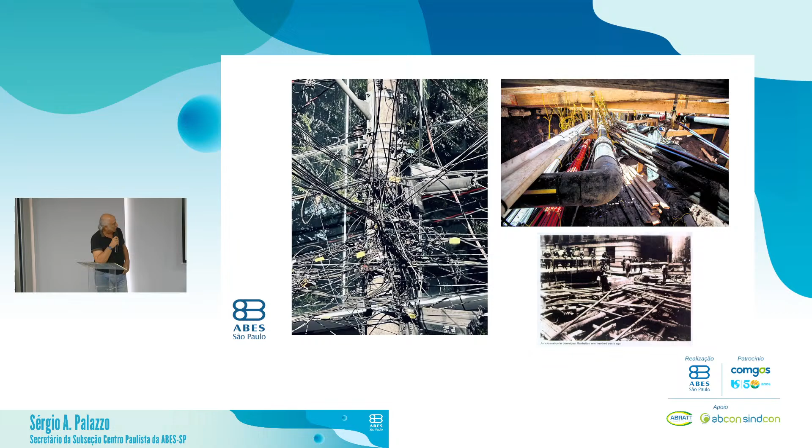Eu acho que há. Então, na próxima imagem, a gente está se valendo já das computações gráficas, do BIM, de todas essas tecnologias que a gente consegue estruturar o nosso arquivo, o nosso ativo do subsolo.

Essa é uma imagem de uma rede, das redes existentes nessa região nos Estados Unidos. Essa outra dá bem uma ideia do que se pode fazer dentro das nossas instalações, todas elas, todos os serviços públicos. A próxima: esse é um cadastro completo ao qual a gente pode ter acesso hoje, todos tendo acesso à mesma base.

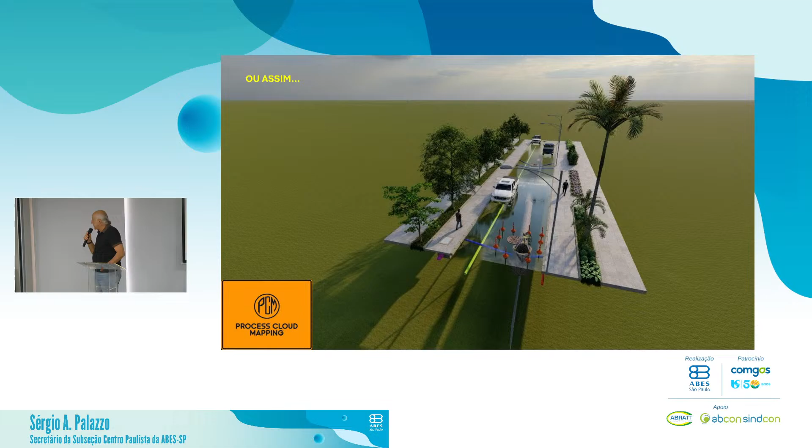E por fim, um vídeo. Esse vídeo está sendo divulgado, já é aplicado na Colômbia. Então, eu sonho que a gente possa fazer isso. A Colômbia fez, por que que nós não podemos fazer?

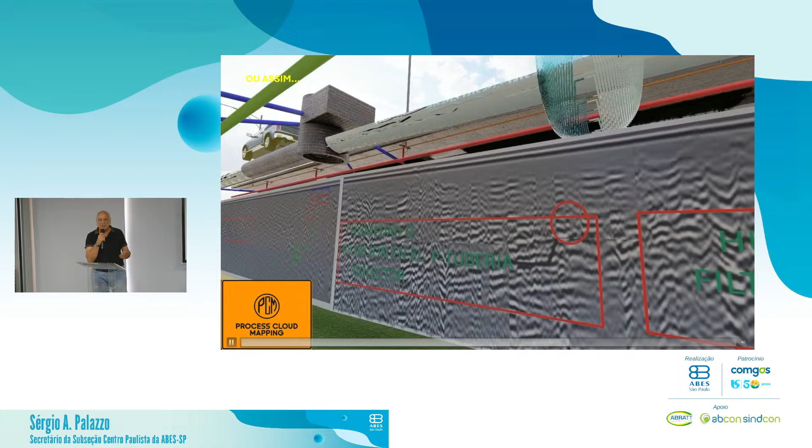Então, essa é a realidade de uma manutenção numa rede de esgotos, traduzida para uma imagem em 3D, numa computação gráfica, baseada em todos os levantamentos que foram feitos. Então, o que vocês vão ver aqui hoje é de que forma eu posso captar os dados, coletar dados, para que o pessoal especialista nessa área traduza esses dados numa exposição desse tipo aí.

Ok. Então, eu também queria ver quem que está já no grupo com a gente, Vinícius. Quem? Ok, nós já temos 3 convidados conosco aqui ao vivo.

Alguns entrarão no horário da palestra. So I want to say good morning for some of you, Sam and Eric. And which is the other one, Vinícius? Quem é o terceiro? Alan Leidner. O Alan Leidner, good to see you or hear you here. And we'll be soon talking about...

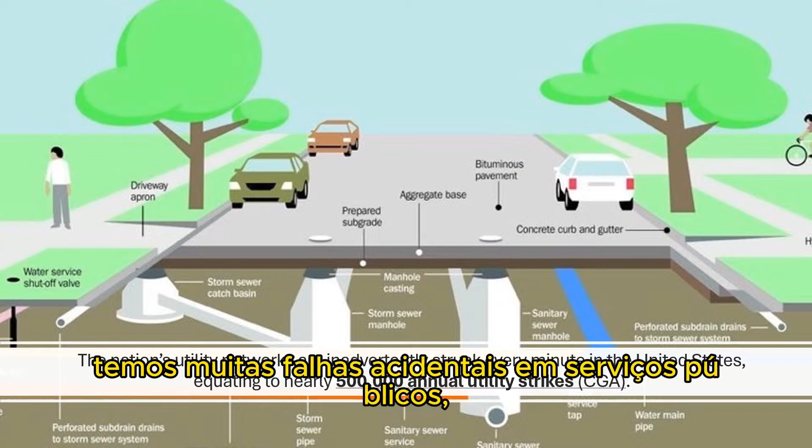If we look at the nation's underground networks, a lot of inadvertent striking of utilities happens every minute in the United States, equating to about 500,000 annual utility strikes, according to the Common Ground Alliance. Some of that striking is a result of horizontal directional drilling, and some of those strikes are from open cut excavation type equipment. But unfortunately, with horizontal directional drilling, we're not excavating, so we're going underground, and sometimes we can hit a utility like a sewer lateral and not even know that we hit it until much longer, years later.

The primary impacts of damaging an underground utility include outages, explosions from gas, fires, flooding, disruption of emergency services, evacuation, downtime for businesses, and a lot of other issues. Some secondary impacts are potential injuries and death, criminal investigations, contamination of contaminants, project delays, financial liability, extra work orders, construction claims, higher insurance, and of course, bad publicity of these types of occurrences.

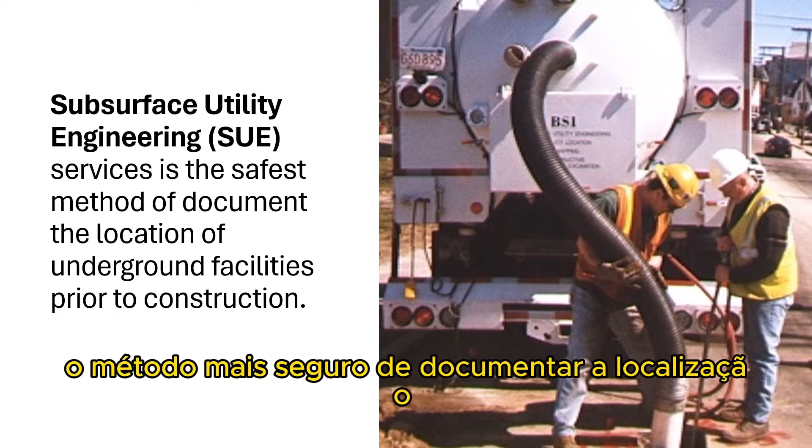The concept of subsurface utility engineering is really important, and it's the safest method to document the location of underground facilities prior to construction. When you look at before construction, there are different types of subsurface utility engineering applications. The most common would be vacuum excavation. We also do things like centerline profiling, utility mapping and records management, preliminary engineering design, cathodic protection, non-destructive methods, and soil sampling.

There are a couple of great standards that the American Society of Civil Engineers has out. One of them is the 3802, the standard guideline for the collection and depiction of existing subsurface utility data.

It's a very famous one, one that's utilized quite a lot. A newer one is subsurface utility engineering for municipalities, and it looks at pre-qualification criteria and scope of work guidance.

A study was done many years ago at Purdue University looking at the value added, and it found that for every $1 spent on subsurface utility engineering, the resulting savings was $4.62. That's a really big savings, almost 5 times the return, because we're identifying those utilities and avoiding costs from striking or hitting a utility.

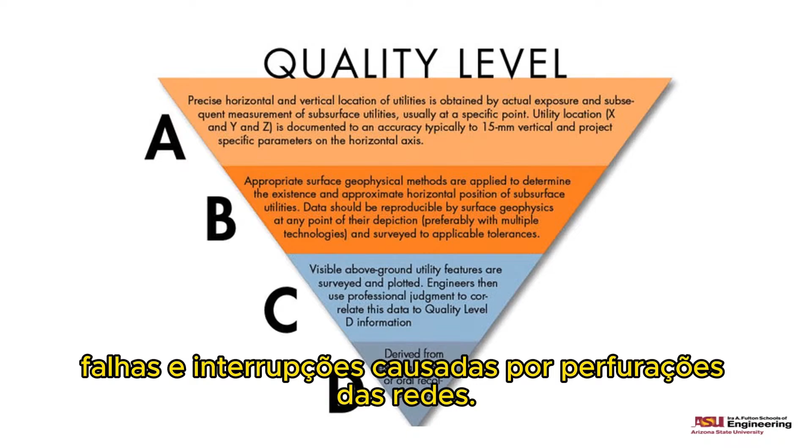We have 4 different quality levels of subsurface utility engineering. Quality level D is the lowest level, looking at existing records or oral recollections of what could be out there, up to quality level A, which involves precise horizontal and vertical locations through actual exposure and measurement of the utility, so you know exactly where it is. Within that range, A, B, and C are the different quality levels of subsurface utility engineering.

Some industry issues we find in utilities are lack of planning. We tend to be in a hurry, so sometimes that results in doing the job without proper planning or investigation. A lot of times we have outdated as-builts or incorrect blue stakes or utility markings in the area. There's also a lack of competent contractors—sometimes they just don't care, or don't really understand, and they proceed without identifying existing utilities. Insufficient equipment concerns, utility damages, and poor communication are also a big part of the industry that we worry about.

As I mentioned previously, excavators or horizontal directional drills tend to be the construction equipment most used for installing underground utilities, and subsequently they're the ones more likely to strike a utility.

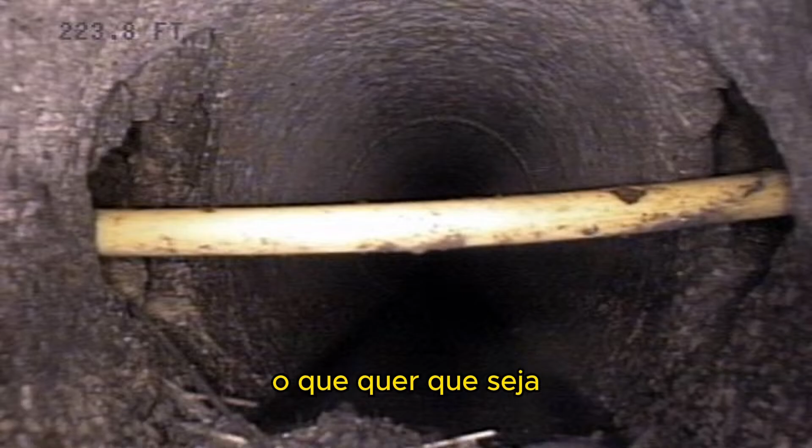With horizontal directional drilling, this is a crossbore. You can see there's a gas distribution line within a sewer service lateral. The problem is it could cause a blockage, and when a plumber comes out with a mechanical tool to try to dislodge the blockage, they nick the gas line, causing gas to go up the sewer lateral into the house, and as a result you could have explosions.

Here's another example of a cross-bore utility. It's a gas line within a sewer line that we have to be concerned about.

A couple of major cases resulted in very significant explosions. I was actually involved as a consultant on all of these cases. One, in the top left-hand corner, was a gas explosion that destroyed a restaurant in Kansas City. Another was a gas explosion that blew up a coffee shop and other businesses in Durham, North Carolina. The one at the bottom is an explosion in Wisconsin in which a firefighter died.

Here's the consequences as well. This is an explosion in Minnesota—you can see this house was completely destroyed from a cross-bore utility where gas seeped up through the service lateral and blew it up. Here's one in Maine. And this is the North Carolina coffee shop I mentioned from the explosion.

This was one in Colorado where the sewer line that was hit was actually a fair distance away—the contractor hit a sewer and gas line, the gas traveled through the sewer quite a distance, and then blew up this particular house, killing a lady. This is one in Florida, a similar situation where a contractor installing a line hit a gas line that went into a sewer and traveled down 2 blocks, blowing up this house, killing a 22-year-old young man and badly injuring his father.

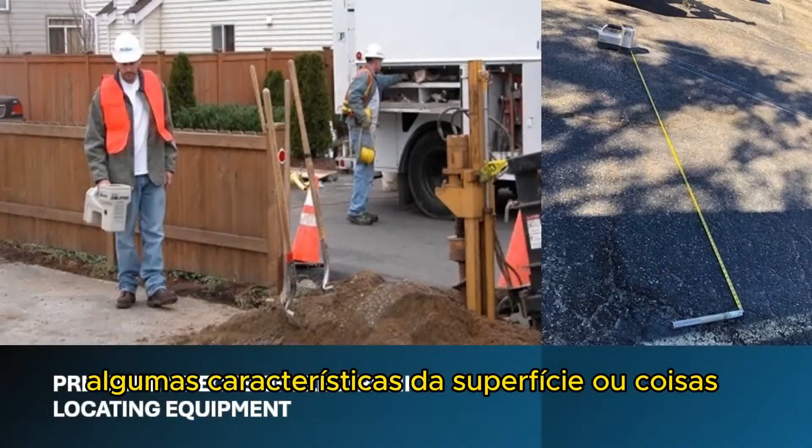So we can minimize our risk by conducting on-site field investigations prior to boring. That's one thing I really advocate—go on site and look around to see what kind of utilities are in the area you're doing the excavation in, whether using an excavator or a horizontal directional drill rig, and try to identify surface features that might indicate a utility. We also do pre-bore checks of our electronic locating equipment, which is really important, particularly when using walkover equipment that relies on electromagnetic signals.

And so we have to make sure that through the area we're going through, we try to identify if there's any sources of interference, active or passive, that could cause some sort of disruption in terms of the depth readings we're trying to get during the case.

On the right-hand side is what we call a 10-foot test. Basically what we're doing is making sure that the sonde or transmitter below ground by the drill bit is actually reading to the locator, the receiver, properly. We lay it out 10 feet, take a reading, and hopefully that reading is 120 inches or 10 feet, meaning it's reading properly. Should it not read properly, then we do a calibration sequence on the locating equipment to try to match it back up together.

In the U.S. and most of the world, it basically adheres to the American Public Works Association utility marking color code. So if you see red, it's an electrical line, yellow is gas, orange is communications, blue is water, etc. When you see those marks on the ground, that's indicating those utilities should be underneath those marks.

It's also important when we're excavating to understand what the tolerance zone is. When a locator puts down a locate flag or paint mark, they're saying their utility is somewhere within a tolerance zone of 24 inches plus half the diameter of the utility. You have to make sure that within that tolerance zone, you identify where that utility is. For example, if you have a locate flag and dig down but can't find a utility there, you need to go within that tolerance zone, that 48 inches plus the diameter of the utility. If you're outside of that range and trying to excavate there, it's not your responsibility to locate it.

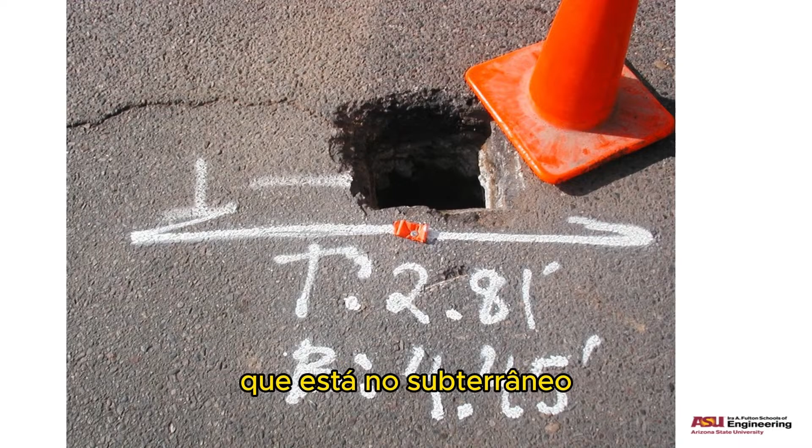This is an example of a small pothole, and you can see identifying that utility underground. T is the top, so it's 2.81 feet deep, and B is the bottom, it's 4.65 feet deep. So you're actually physically measuring down to know exactly where that utility is.

In design and planning, as I mentioned before, it's really important to identify site-specific hazards using subsurface utility engineering and looking at existing utilities, existing structures, and geotechnical investigations. We use bore planning tools, electronic tools that really help out during the process, and enable HDD crews to evaluate actual deviations and make adjustments during construction.

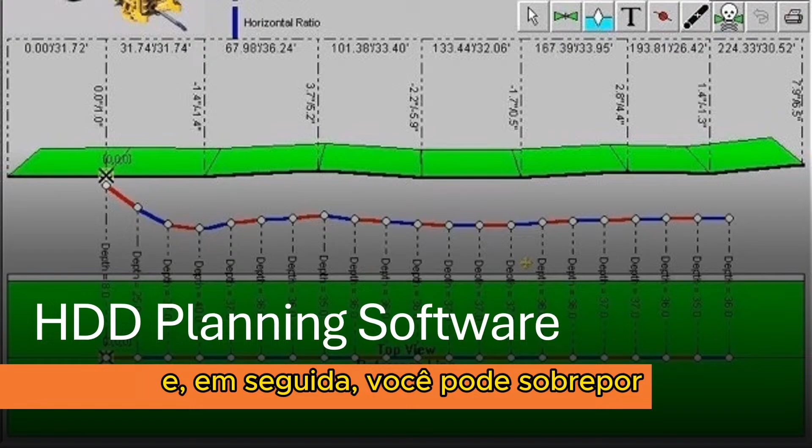Bore planning software is available for HDD design, such as this one here. This is an actual one that a contractor used, where they can do the planning ahead of time, similar to this other HDD bore planning application. That really helps - you can plan every rod underground, and then superimpose the actual bore path that was taken, which is captured within the receiver.

I mentioned site investigations - walk the site. Look to see if you see manholes. If you see a manhole, that's a good indication you probably have a sewer line coming out of there, and you can go down and see how deep it is. If there's an electric transformer box, there should be electrical lines coming out, so you should see some red marks. Gas barbecues could indicate gas lines. Road repair marks, like in this case, obviously some repair was made to a utility, so there should be a utility underneath there. Any kind of evidence of existing utilities is really critical to look at.

Some sources: this is the Horizontal Directional Drilling Good Practices book that myself and Dr. Bennett were co-authors of. This is actually the 4th edition of the book, and it has been translated into Portuguese.

So if you go to Abratt or ABES, you can get copies of this book that will give you a lot of good information on proper procedures and practices when you're looking at horizontal directional drilling.

A couple of final thoughts. I think it's really important, the one-call system that identifies where the utilities are, it's really the last chance to prevent damage. The best chance is to start damage prevention in the planning and design stage with a long-term asset management strategy for determining and maintaining baseline conditions. So what I advocate for is that in the planning and design stage, we identify where these utilities are, and when we do the design, we can create a design that is not in conflict with any of these existing utilities.

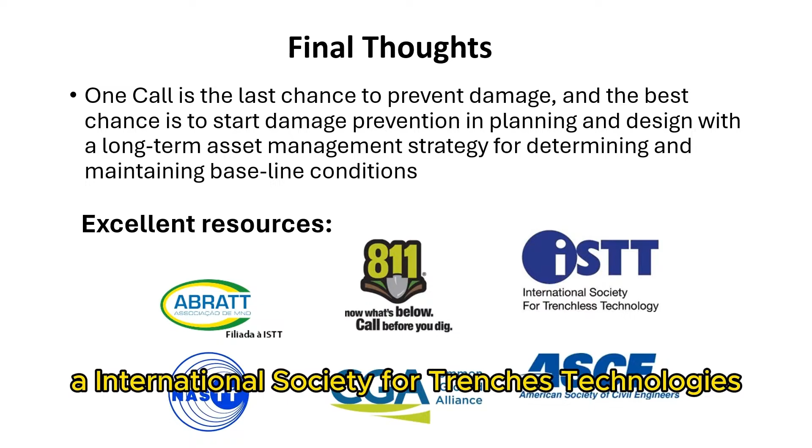There's a lot of excellent resources out there: Abratt, the North American Society for Trenchless Technologies, 811, which is the one-call system in the U.S., Common Ground Alliance, which is a really big organization for damage prevention, the International Society for Trenchless Technologies, and the American Society of Civil Engineers. These are all organizations and associations that are big advocates for damage prevention and safety, and I think they're excellent resources to explore.

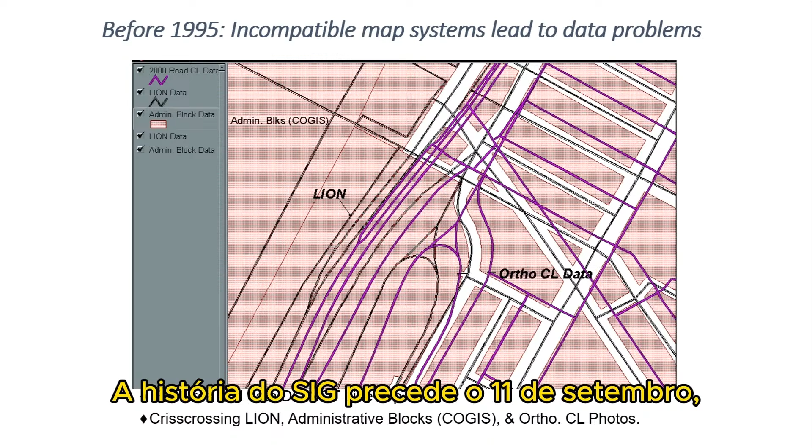The history of GIS preceding 9/11 goes back a ways, and it's important to understand that before 1995, there were numerous GIS systems in New York that were unrelated to each other. They were in their own silos, and when the maps were brought together, they didn't really overlap, so you missed a lot of the data collaboration that you might have had if it was an enterprise GIS system. We just didn't have it, but we recognized that we needed it.

Other examples of some of the GIS work we were doing, aside from street center lines and parcels, was the city water main mapping project, which was creating an infrastructure layer of the water mains of the city. We were also working with GIS upstate to map the entire watershed of New York City.

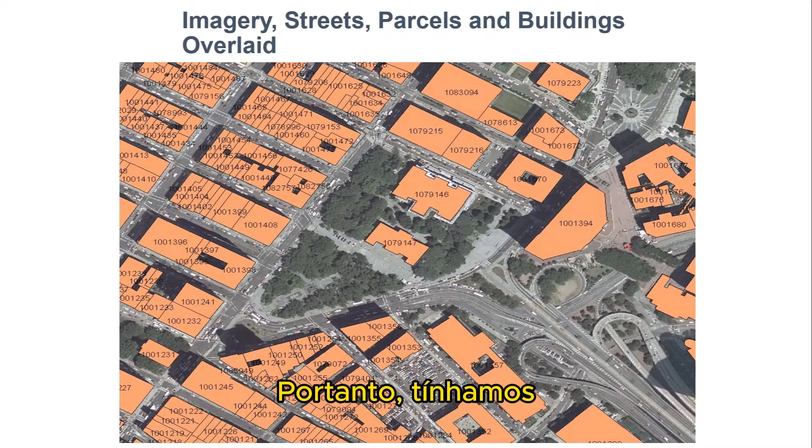In order to get enterprise GIS in the city itself, we had to get some money first, and then finally got aerial photography and did feature extraction of probably millions of different features between 1995 and 1999. The results were imagery over which the streets were overlaid, and the parcels and the buildings, and ultimately hundreds and hundreds of other layers. So we had a completely integrated set of data sets, all with spatial identifiers that could link them to a common base map.

Another way of looking at it is that if you take your key location indicators in a jurisdiction and relate them to each other based on a common base map, you can then relate all the data sets associated with each of those geographic identifiers, and therefore all the data is interoperable regardless of what the location indicator might be. At this point, we have thousands of data sets that relate to each other in New York City.

This can also be seen as far as the underground is concerned, and infrastructure, because by relating each of the different utility layers and the infrastructure layers of the city, you basically can bring together the data associated with them, and once more have a very powerful utility where you can share data between infrastructure organizations so that it overlays, and you could do much better planning, emergency response, and just plain construction work.

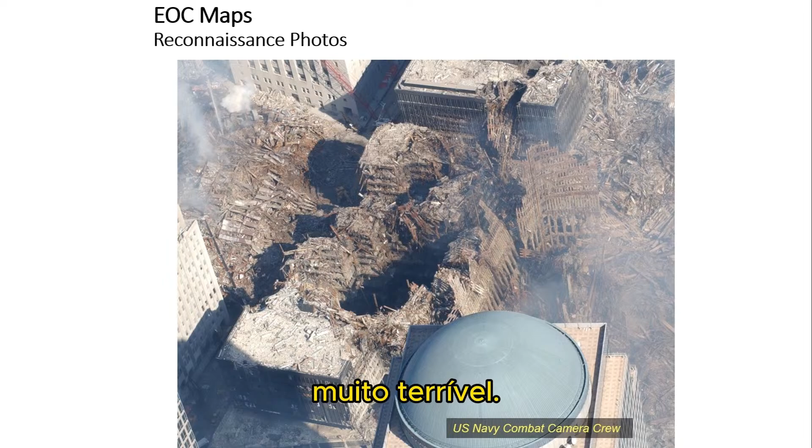What I want to show you here is based on the fact that since it happened in 2001, we already had the city's base map distributed to all the city agencies. So almost as soon as the first impact of an airplane on the World Trade Center, our fire department was able to produce a series of maps that allowed response teams to go to the site and know where they were oriented on the World Trade Center, because many people coming in for rescue operations were not really that familiar with Lower Manhattan. These maps were a first product turned out literally within the hour of the attack.

Ultimately, more sophisticated maps were developed, often in collaboration with US FEMA, the Federal Emergency Management Agency, using quite sophisticated methods of performing search and rescue operations and being able to know where you were the day before and where there were dangerous areas that you needed to stay away from. The fire department and FEMA also developed an application that allowed for improved placement of cranes being used both in search and rescue and to clear the area.

We also were collaborating not only with the federal government, but with our state government colleagues. They were up in Albany, New York, about 140 miles away, but they were able to organize the flying of aerial photography, imagery, oblique angle photography, LiDAR, and infrared, and were sending it to us on a regular basis. That took a big burden off of us. It helps so much to have the federal, state, and local governments working together to coordinate the data gathering and then the analytics.

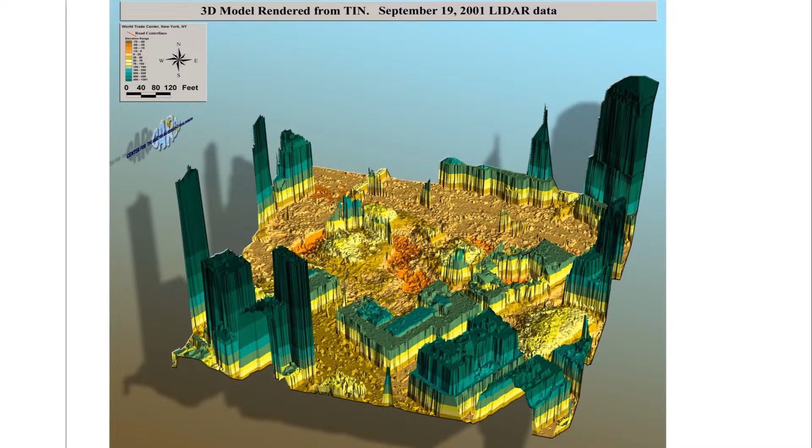From the LiDAR, which was the imagery of the destruction on ground zero, you can see the darker orange is where the collapse went as much as 50 feet below the street surface, and you could see the fragments of the buildings that were still standing.

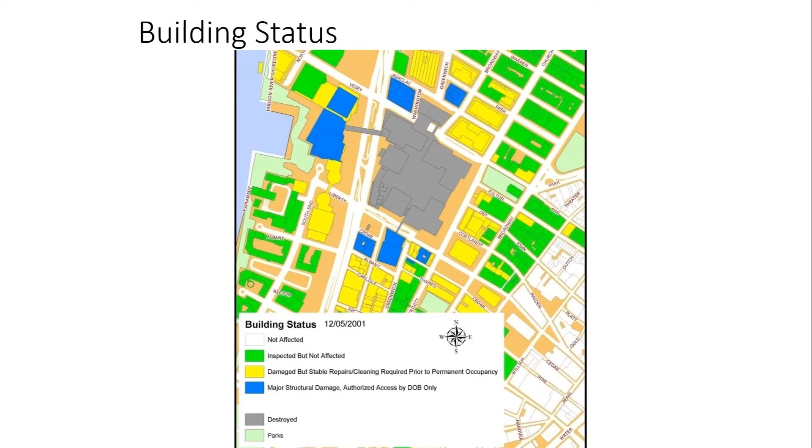Some of the map output showing the classifications of each of the buildings that were surveyed. This was a very vital application. In fact, handheld applications were pioneered here for the city, and it was the first time we were using this technology.

One of the biggest operations was understanding exactly what was going on beneath the street, the utilities, the geology, and some of the geotech structures that were down there. For that, we had to call together, really for the first time, all the organizations in the city that we could find that had infrastructure elements under the ground.

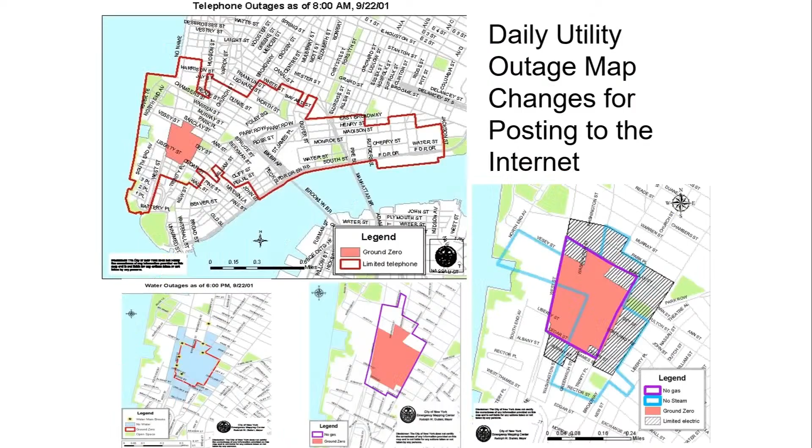Part of the product coming out of the deep infrastructure group was a daily mapping of outage areas in Lower Manhattan. Here you see no electric service, no telephone service, no water service, each indicated by their own color code. Those maps changed on a daily basis. This was very essential to give a common operating picture to all the 24 or more agencies working their own particular mission in the area.

Further analysis was done in terms of the various elevations of the different levels in the subway system, from the street, from the entrances, down to the turnstiles, down to the track levels.

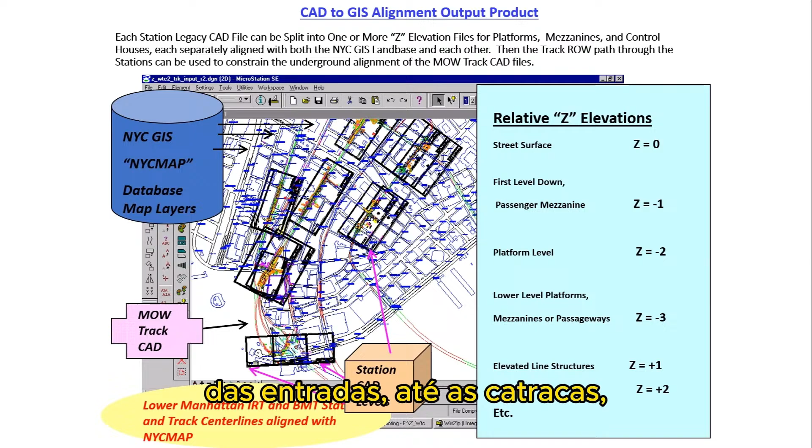We captured infrared photography to see where the fires were burning underground. This was absolutely essential because we wanted to safeguard the fire and emergency response personnel working on the pile so they would avoid the hot spots.

The infrared imagery was used to help locate a 200,000 pound tank of Freon gas, which was used for the air conditioning system of the World Trade Center, and was underground and surrounded by fires. We needed to understand where the fires were in relationship to the tank so firemen could put out the blaze in the immediate vicinity of the Freon tank.

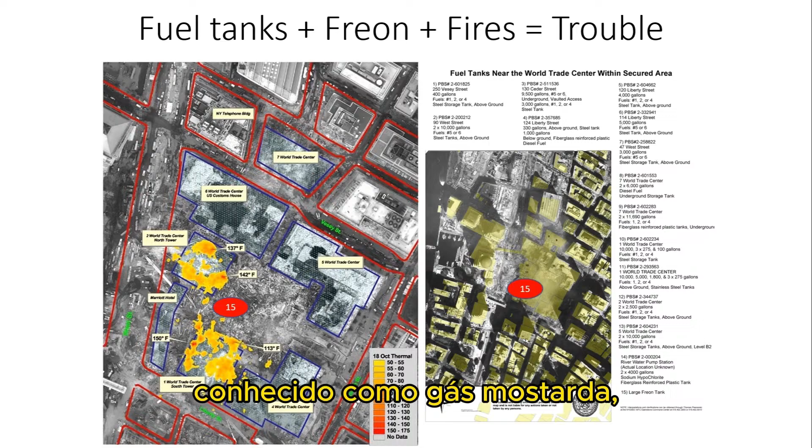Some of you may know that when Freon is subjected to high heat, it can turn to phosgene, known as mustard gas, which would have potentially produced a secondary explosion and the release of poisonous gas across much of lower Manhattan. It was a good thing we found it.

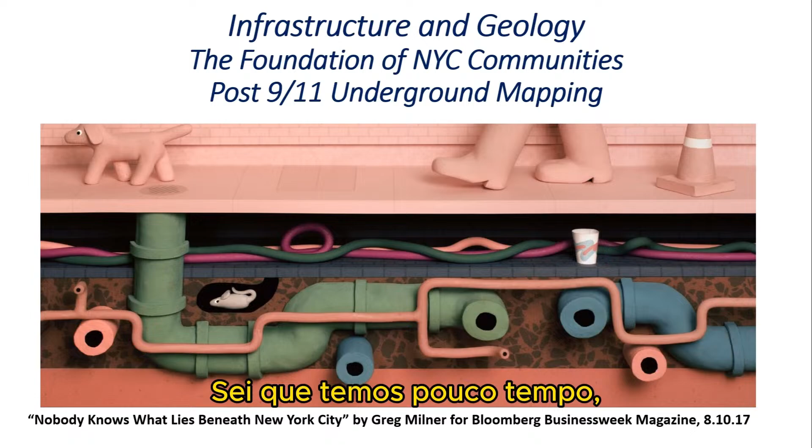There's plenty more about 9/11, and the number of slides could have been in the hundreds, but I showed you a selection. I know we have limited time, but I wanted to talk about after 9/11, and the fact that it impressed upon us the importance of mapping underground utilities, underground geology, and anything underground that could have bearing on what was going on at the surface.

Here's an excerpt from a magazine article you could access by Googling Bloomberg Businessweek magazine - nobody knows what lies beneath New York City. You could read the whole article, but we became very eager to make sure the city continued on its path of mapping the underground and bringing together the different utilities to talk to each other, compare notes, and share data.

It was not smooth sailing.

However, there were advances. The MTA mapped in 3D, or 2.5D, all the 600 or so subway stations in the city to maintain a common operating picture and manage any events that might occur in subway stations underground. That was a big success and an important addition to our data sets.

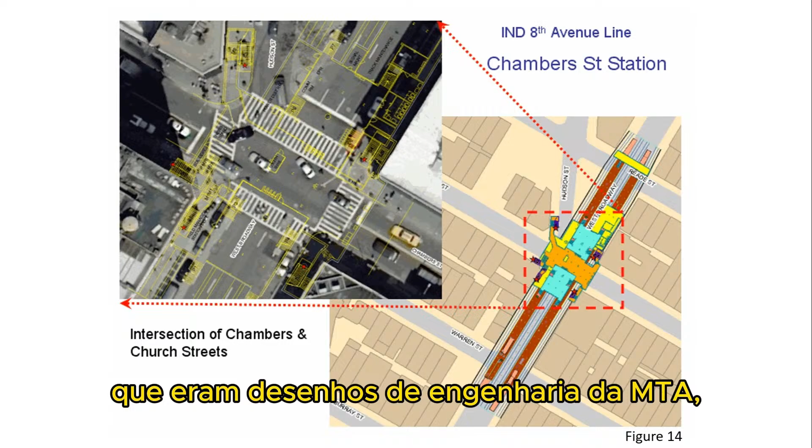You can see how the base map on the right was used as an underlay for station drawings, engineering drawings by the MTA, which were oriented, sized, and placed on the base map and became a base map layer as a result, so could be seen with all the other base map layers - enormously powerful and useful for the Metropolitan Transportation Authority.

We started to work with the Open Geospatial Consortium, an international body for data standards, because we felt it would facilitate development of the underground map of the city if we had a data model that could fit in all the key data sets we wanted to include.

On the left you see the different networks we were interested in capturing data about, and the use cases for how that data would be used: to reduce accidental strikes, to reduce change orders and unexpected obstructions when doing major construction and excavation work, for emergency response when you had to know what was underground quickly because something was going wrong like an explosion or a water main break, and for longer range disaster planning and response, since New York has been hit by its share of disaster events, from extreme flooding to the terrorist attack to blackouts.

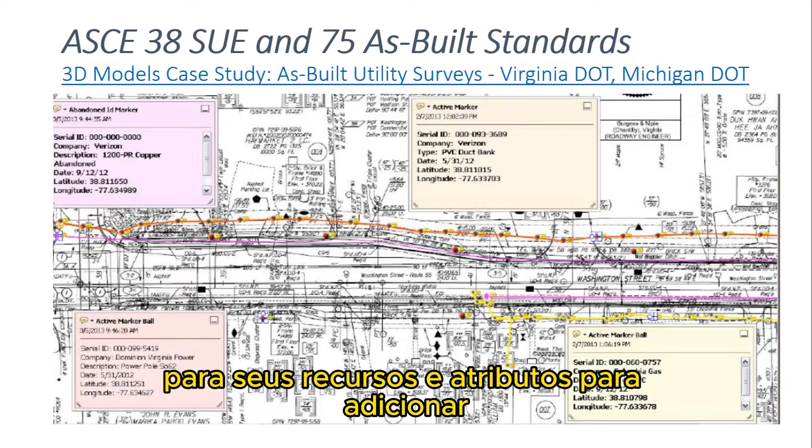We accessed the work being done by the American Society of Civil Engineers, their ASCE 38 and 75 as-built standards, and SUE standards for their features and attributes, to add to the model we were building - at least at this stage, a conceptual model of the underground infrastructure.

I think MUDI stands for Model for Underground Data Design, or Data Definition and Integration - there you go. So this has now come a long way.

The MUDI model is now being used by the UK, the entire country, to map their entire underground infrastructure. It's a big project, but they're using MUDI because they did the cost-benefit analysis and it pays off for them. About a year later, New York City committed $10 million to map its underground, called the 3DUG project. We're doing it in New York City as well, and I know Canada is considering it, and there's interest from Japan and maybe Brazil. We're certainly more than happy to consult with you and support you if that's a path you choose.

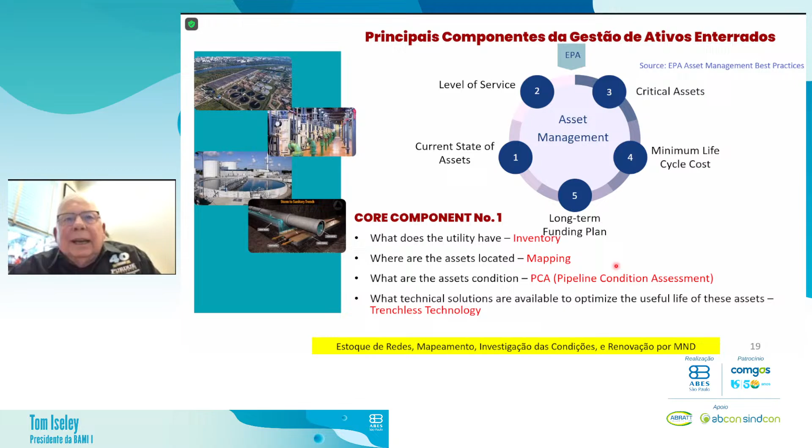Knowing what we've got, the inventory in our system, but also the location and mapping, that's the really major challenge of trying to put together the plan, is determining where it is. And that's how asset management can tie into things like dealing with cross bores.

When we think about innovation in that particular area, we've got to think about subsurface utility engineering as being a key part of really determining where things are. And then we've got to also look at the condition of those pipelines and assets, and look at solutions for them, and then put all of that into some type of data management or software system that can help us determine what we need to do, what it's going to cost us, and what it ended up costing us, and being able to put together the plan. So these are key aspects of the plan.

So what are we really talking about with subsurface utility engineering? It gets into location and mapping, and there's a lot of different parts that go into it. What we've been able to do here with Purdue, BAMI, and ASCE is put together 5-day schools that really teach what this standard is all about.

When you look at these two standards, some of you I'm sure are very familiar with them. Both of these are 38. This one was published in 2002. This one was published in 2022. 20 years went by, and what we saw in that time was the design community, the design engineers, did not embrace the principles taught in these standards as we thought they would when we were developing them. So as a result, we've put together a 5-day school that can really teach these principles.

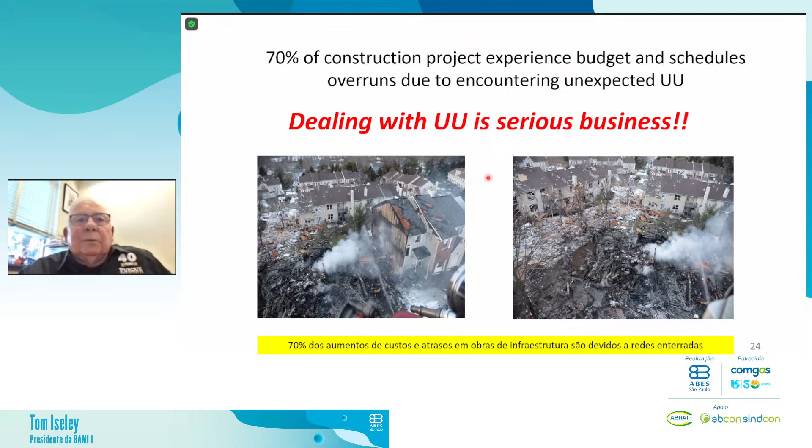It's reported that about 70% of construction projects are impacted by underground utilities. It's a serious business because it impacts the budget and the schedules of 70% of projects. So we're paying for it. The risks are great. The impact of these events is great, from project delays to the cost of doing the work, a lot of extra work that goes into it as a result of the risk.

of unknown underground utilities. So what we try to do with ASCE 38 through SUE is really take that total risk and try to apply it to the individuals or companies best suited to take that risk. So we have the design engineer taking part of it. These are the 4 quality levels we're dealing with: D, C, B, and A.

As we move through the SUE process, we see that the design engineer is taking less and less risk. The SUE professional, who is licensed and trained to locate and map these utilities, takes more and more of the risk. At the same time, what we're doing is eliminating a lot of the risk.

One of the studies done a long time ago, probably 25 years ago, by Purdue University told us that for every dollar spent on SUE, there's a savings of about $4.62. But additional studies since then show the financial benefit is much larger than this, getting up to about $9 or $10 for every dollar spent, as a result of avoided damage.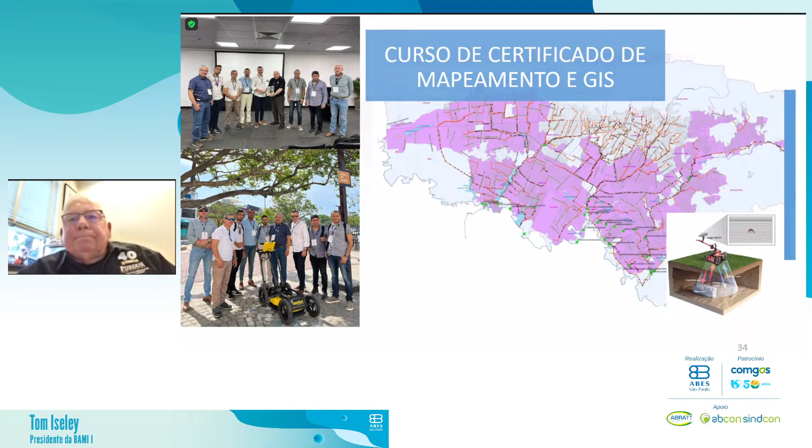So we have done these, working with other organizations in Latin America. We haven't put on a full 5-day school there yet, but we've helped them develop their own two-day school on ground penetrating radar and mapping. We do the certification of it, training the instructors and certifying the attendees, and that's what we're doing here in Colombia. Basically, we're continuing to advance the ability to locate things underground, from guesswork to witching rods to now multi-channel sensors.

So what I'd like to conclude with is that our team is very interested in bringing this 5-day school to Brazil. We've talked to Sérgio about that, and we feel this could really help advance not only asset management but also the ability to deal with things like cross bores and other impacts that can come from not knowing where the underground utilities are. Sérgio, with that, I'll turn it over to you to answer any questions that may have arisen.

All right, glad to be with you. Appreciate the opportunity to share these thoughts with you. Thank you.

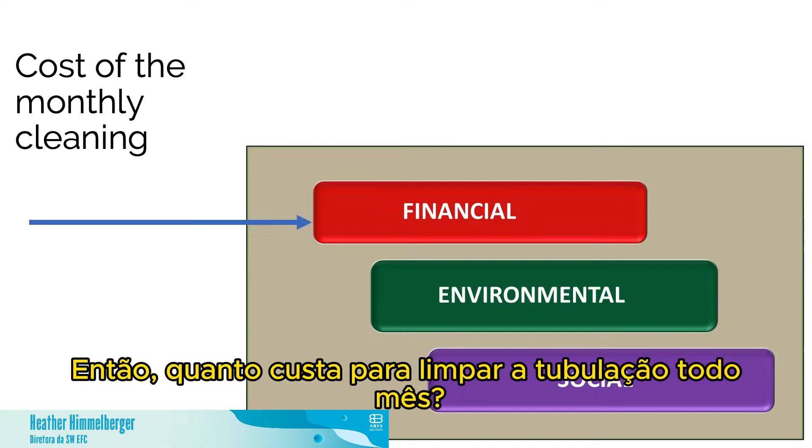So what are the triple bottom line issues associated with this problem? Triple bottom line refers to financial, environmental, and social. So financial is the cost of the cleaning. What does it cost us to clean this pipe every month with the crews, with the equipment, all of that?

Environmental, we can have potential overflows of sewage on the street or back up into businesses, which is really not good. We can have potential violations at the treatment plant where this material is going. And when they clean the pipe out, if the people don't dig this fats, oils, and grease out, that's where the violations come from. And then they have to dispose of that material that they dig out at the treatment plant. So we're having to dispose of the fats, oils, and grease that are removed.

In terms of social, that's always related to people. There's a big job frustration associated with this. So the crew members that have to do this every month, and it takes 4 crew members doing this, are very frustrated. There's a high, what I personally call the pain in the ass factor. So the idea that this is such a difficult thing, it's a really unpleasant job, nobody wants to do it.

There's an opportunity cost because there's 4 people doing the cleaning and there's 2 crew members at the wastewater treatment plant digging the material out. So there's 6 people that are spending time every month, and there's an opportunity cost, meaning those people can't be doing something else. And there's disruption to the traffic every month. So they have to block off a portion of the street while they clean the sewer line, and it takes the better part of a day to get this whole thing done.

So is there anything else that could be done other than monthly cleaning? I threw the question back at this individual and said, what could you do instead? And a very simple solution emerged. We could replace that piece of pipe and make the pipe straight, so that we don't have the sag in it anymore, and then we wouldn't have to do our monthly cleanings.

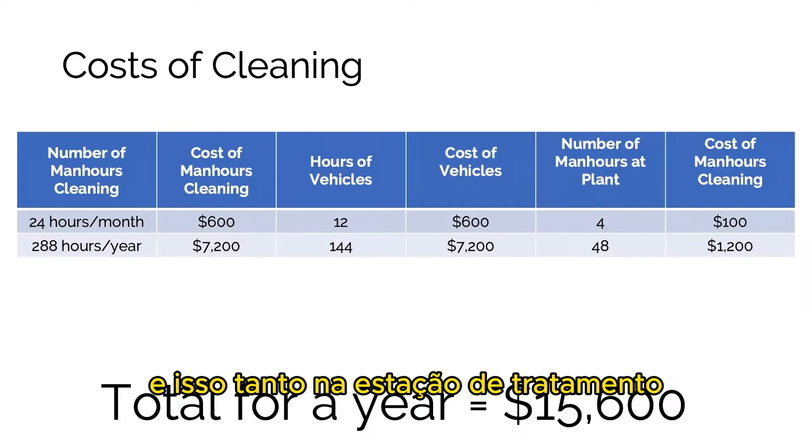So if we look at the cost of cleaning, the estimated total for the year is about $15,600 to clean that pipe annually, and that's both at the treatment plant and in the street. The cost of replacement at their cost is estimated to be $37,800. So it's pretty easy to calculate the payback period, which in this case is about 2.5 years.

So if we had this data and you think in your own mind, what would be your choice? What would you do? What's the best option? Maybe I should mention that it had been at least a decade of cleaning prior to this point, and there was no end in sight of when they could stop doing the cleaning, because they have to keep doing it every month, and maybe it would have even gotten worse over time.

So if you know that information, the best option really is to replace the pipe. The payback period is pretty short, 2.5 years, and we've already paid for that pipe over and over again. And again, there's an opportunity cost where we could put those workers on something else if they weren't having to do this every month.

So what keeps people from making a better decision? In this case, it seems rather obvious once the data is shown that yes, we should replace the pipe rather than continuing to clean it, but that decision hadn't been made. And many decisions like this aren't made.

So what keeps people from doing that? I think one of the big things is lack of asking the question. You need somebody to ask, what should we do instead? Or do we have to do this all the time? So the first thing is just ask the question. The next part is, did anybody listen when people ask? So if somebody asks the question, is upper management, is a boss, is a supervisor listening to staff when they ask?

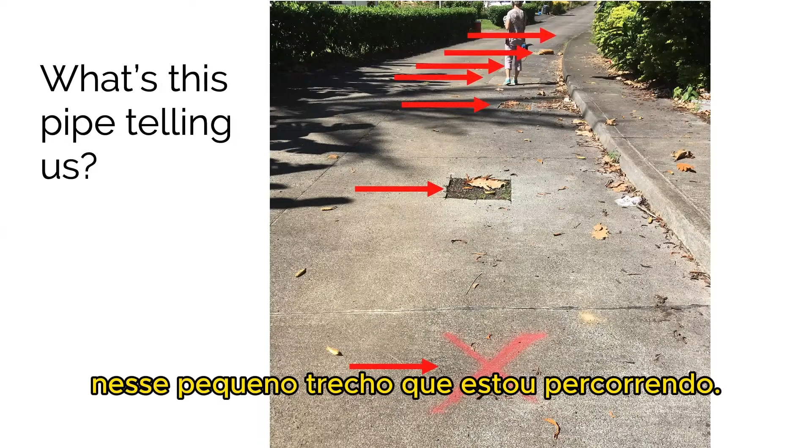Here I am walking down the street in a utility, and the arrows are pointing out places where there are pavement cuts in the street where they've made repairs. There are 7 repairs on the street in this short section I'm walking along. They've really reached a point where the repair process is not working for them anymore—it's reached steady state, and they can't even pave it fast enough before they're making the next repair.

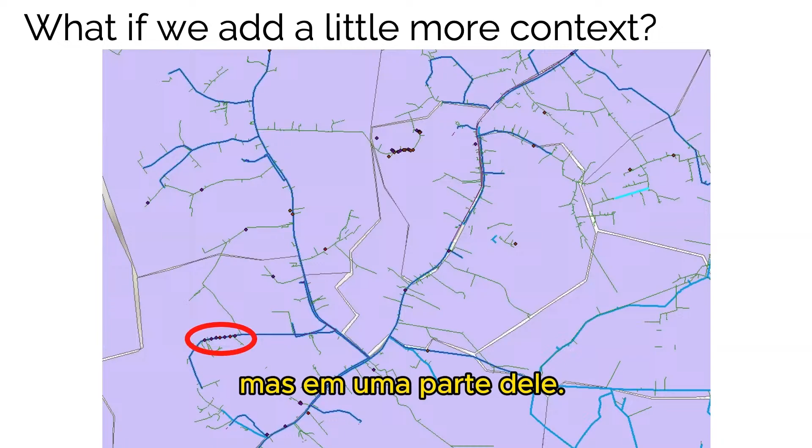So what if we add a little more context? In red right now is the pipe we were looking at, and you can see pipe breaks over a big portion of the system—not the whole system, but a portion of it. Other than one other pipe, which was clearly even worse, the pipe we were looking at was the worst performer for the last 7 years. So we have 2 pipes in this area that are bad—ours is actually the second worst.

So let's go back to our original question: what story is this pipe telling us? It's telling us that pipe repair is no longer effective—the underlying pipe structural integrity is just not there anymore. The pipe is getting worse over time, it's one of the worst pipes in the system, and basically it's time for replacement. Continuing to do repairs is not the best option; we need to move along and do replacement.

Let's look at another example, combining questions and stories. We have a lot of pipe—same age, same size—and we can't replace it all. What do we do? This system was looking at a lot of pipe in one area that was all 75-year-old cast iron pipe, 6 inches. They were saying we want to replace all of it because it's reached the end of its useful life, but we can't because we don't have the money.

Our take is that, generally speaking, you don't replace pipe because it reached age—you replace pipe because it's not performing anymore. So what information do we have to go on? They did have a database of 15 years' worth of break data. It wasn't really being used for anything, but at least they were still adding data to it.

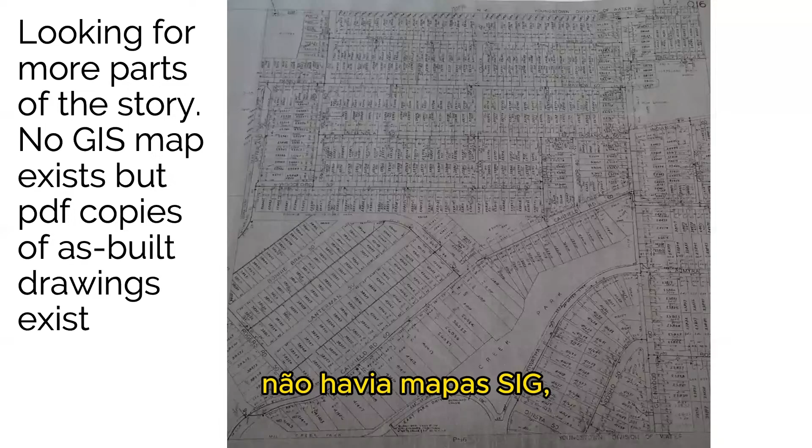There were no details about the breaks in terms of what type, so we were looking for more parts of the story. There were no GIS maps, but there were PDF copies of as-built drawings. It's not the easiest drawing to read, very dark, so we took those drawings and adjusted them using software to make them more readable, and made printed copies color-coded by pipe type and size to help create the GIS map we ultimately made.

We also placed locations of breaks on a GIS-based map, color coded by size. One issue was that we used address matching software, which isn't perfect, because pipes are often on one side of the street or the other. There might be two pipes in the same area, and you have to choose which pipe that break was on, so it was tricky to tie the breaks to the pipes.

But we did the best we could, and it was the only data we had, so you just have to work with what you have. We were interested in one particular area in the system, where all the pipe was 75 years old, 6-inch cast iron pipe. We combined all the information about break data and color coded by the number of breaks in the pipe.

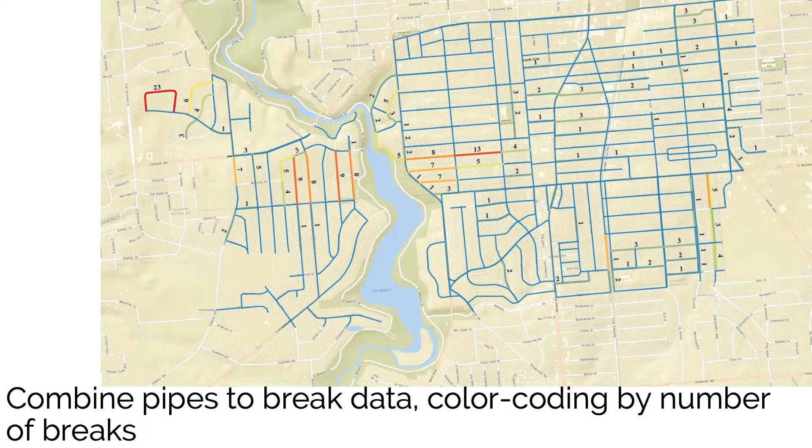The blue pipe you see is pipe that has had 0 or 1 break. The brighter colors like reds, oranges, and yellows are where there are way more breaks in the pipe. You can see there are 2 places in the pipe where there were a lot of breaks.

One was this area where there were 13 breaks, and breaks were increasing over time. If you looked at data for break rates, the breaks were increasing over time. The other area was this spot with a big bend, and there was a huge concentration of breaks around the bend of that pipe.

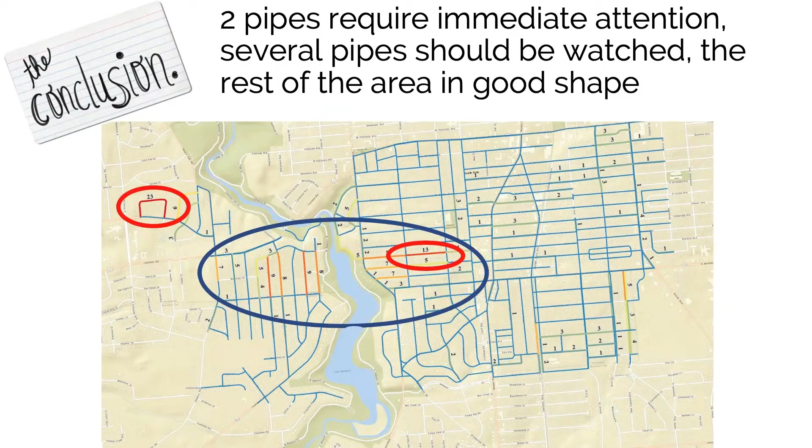So 2 pipes really require immediate attention, those with 23 and 13 breaks, and they could be replaced right away. Then you'll notice an area in the middle with a moderate number of breaks per pipe, and that area could just be watched. Maybe a few of those might need to be replaced, but mostly you could just watch that area and see what's happening.

And the rest of the area really had nothing to be done, very little was happening. Well over half of the area had no breaks or just 1 break over a 15-year period, so there's really nothing they needed to do there. This would save them a lot of money and effort because we're focusing on where the problem is, and it's not a universal problem. It's a very specific problem, and one that they could address.

Combining questions and stories in another case, we have spent the same amount on small diameter pipe replacement for a long time, over 15 years, but nothing changes. This was back a while ago, so things have changed, thankfully. But the start was boxes and boxes of paper work order data, and unfortunately that was all work orders. So we had to search through thousands of paper records to find the hundreds of records that addressed mainline breaks in the system.

We created an Access database and GIS map of the data. The strengths and weaknesses of this data: 15 years worth of data, 12 years paper, 3 electronic. A fair amount of detail was there, dates were available, repair types were known, and some data on why the break occurred. This information also included what type of pipe, but it wasn't GPS located data.

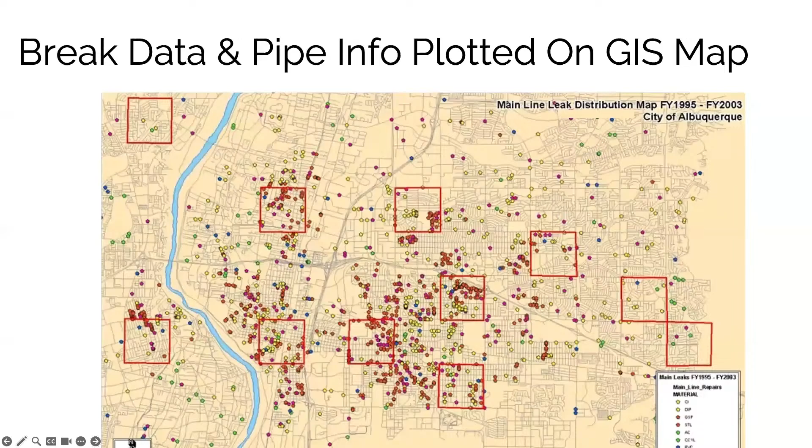So we plotted the break data on a map, and you can see pipe type is shown. If you look at the map quickly, most of the dots are red and yellow. So we'll take away everything else and just leave the red and yellow dots. Red dots are steel pipe, yellow dots are cast iron pipe, and roughly half the dots are red and slightly less than half are yellow.

That would be okay if the system was half steel and half cast iron, but it turns out light blue in this picture is cast iron, and red is steel. So only 5% of the system is steel, while well over 60% is cast iron. We're having an outsized problem with steel pipe, where half the breaks are occurring on just 5% of the system. They used to replace pipe based on ease of construction, just picking a 1-mile section to replace starting where it was easy.

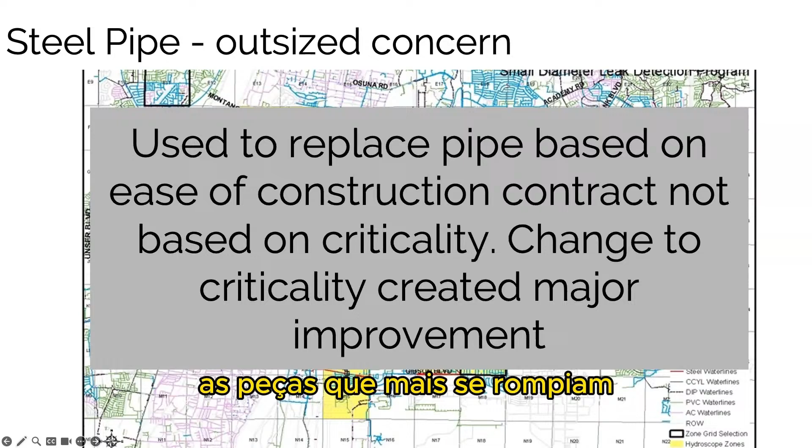They changed to a criticality model where they picked the pieces that were breaking the most and had the most consequence of failure, and that created a major improvement. They started their asset management program in 2011, and in the first 5 years of implementing it, there was a 45% reduction in the break rate and $9 million in avoided costs, which is serious money.

Here's another case. They thought they had a big problem with pipe breaks, but didn't have any way to analyze it. They had a physical map book they would draw notes on, and a call log that just had calls from 8 a.m. to 5 p.m. - so that was one tiny part of the data, and it only covered 18 months.

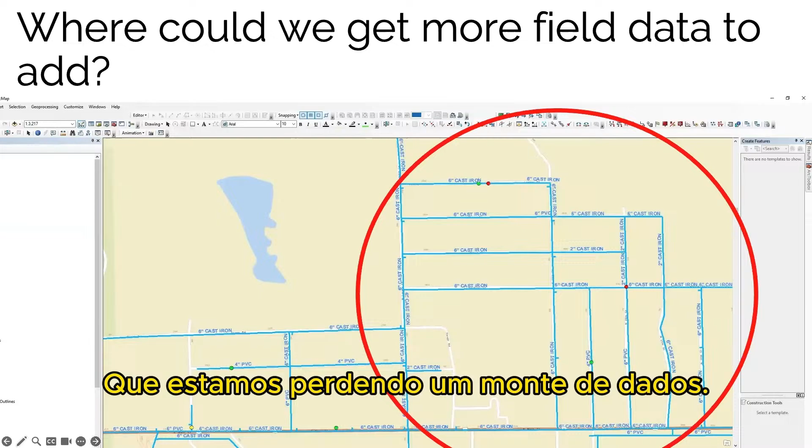So we put their paper maps into a GIS format, and we also took the data they had related to pipe breaks based on that 18 months. But we noticed they thought the worst area was in this red circle, yet there were very few breaks there. So what does that tell us? It tells us we're missing a bunch of data. So where could we get it?

We found out they hadn't paved the roads in about 20 years, so we GPS'd the pavement cuts, and we could tell based on the location of those cuts what pipe was likely breaking. We analyzed that combined data and found places with lots of breaks, some with not too many, and one area with 27 breaks right outside our study area - which was really where they needed to replace most of the pipe.

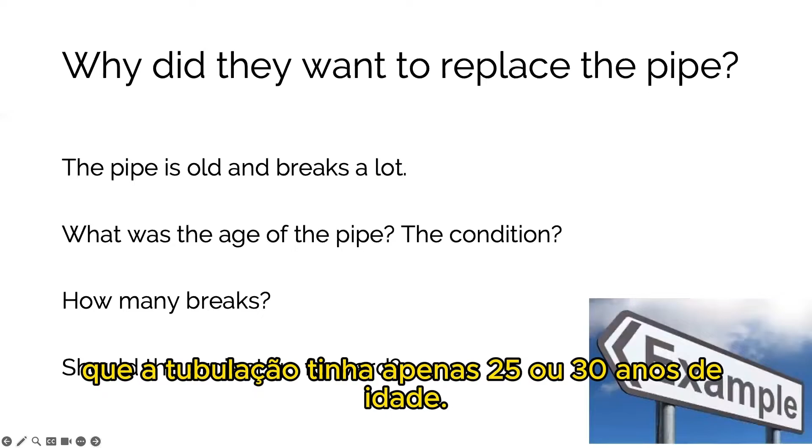In this case, there was a system that had applied for $5 million to replace all their pipe. But what was their reasoning? The pipe was old and breaks a lot. When we asked the age of the pipe, they didn't know. We ended up finding out the pipe was only about 25 or 30 years old, the condition was unknown, but it was PVC pipe, so we didn't expect the condition to be bad. They also didn't know how many breaks they had, so the project was really questionable whether it should go forward.

So what data did we want? We wanted to know more about the pipe breaks and why they were happening. What did the data tell us? That they really didn't have much of a problem - there were only 5 breaks one year and 6 the next. They really needed a much smaller project where they restrained a joint causing most of their breaks, which hadn't been restrained before, plus some loop lines and a few other things. That would have solved their problem, and it ended up costing them $50,000 to do the project.

So they saved $4,950,000 by doing something else. Simple tools were used in these cases, but mostly it was about the thinking. And that's what asset management, again, is all about.

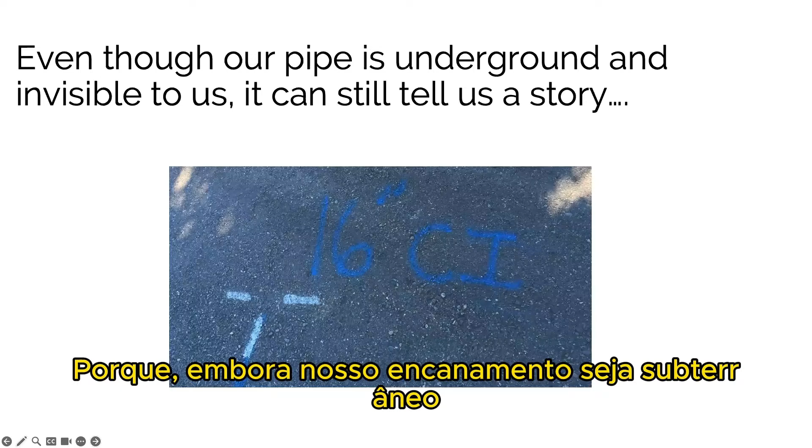As a wrap up, a more robust asset management program can be developed by working through the issues. It doesn't need to feel overwhelming and complex. Start simple and work up. You can use all the tools you want, just make sure they don't obscure what asset management is all about. And remember, just because you've always done it this way doesn't mean you have to do it this way. You should ask questions, make connections, and solve problems. Because even though our pipe is underground and invisible to us, it can still tell a story, and we have to be willing to listen. Thank you very much, and I'm happy to be with you today.

Heather, thank you very much for your presentation. I have one question. Do you have an example where this has been applied in a small municipality, for example?

Of the, hold on a minute, I'll start my video. Great. Hi, everybody. Yes, some of those examples were very small communities. We have used this in a community as few as 50 people, all the way up to communities that have millions of people, and everything in between.

So this is very applicable to small communities that have 100 people, a couple hundred people. And the simpler techniques you use, the better it is for those small communities. So it can work very, very well in small communities.

One community, we saved them almost $5 million by doing this type of technique. It only took us a few months to go through the data and figure out that they could do a $50,000 project instead of a $5 million project and have a better system. And that was a community of about 300 people. So this can work really, really well in small communities.

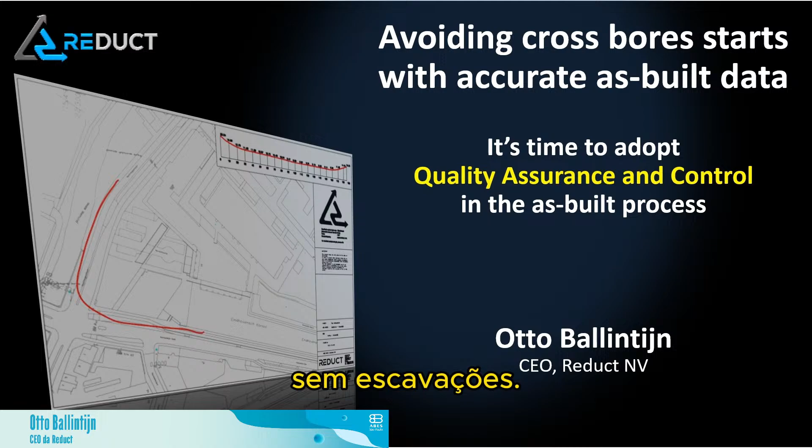Good afternoon. My name is Otto Ballintijn, I'm the CEO of Reduct. We're based in Belgium, and we manufacture gyro mapping technology. I'm honored to be part of this interesting and very focused webinar, and I would like to thank Sergio and his entire ABES team for setting this up and making this possible. I hope that our contribution will also shed a different light on the issue of crossbores. What I'll be focusing on today is the value of having an accurate as-built, or the actual location of an infrastructure, to assist or help avoid crossbores. In particular, I want to highlight a new feature which means we can now remotely assess the quality of an as-built process on new trenched or trenchless pipes. So without further ado, let's start.

I always like to start with this picture, because basically, let's just be clear about what happens underground. If you look at this picture, the answer is probably we don't really know what's going on down under our feet, despite the fact that there is very sophisticated technology available that will integrate the data stored in GIS platforms to make it virtually visible on a pad like you see here. But the quality of what you see on the pad is directly related to the quality of the data that's in the GIS, and it's the quality of the data in the GIS that is often questionable.

So let's talk about some obvious questions about as-built. Is an as-built important? Sounds like a stupid question, but it is really important. And why is it important?

Because if you don't know where your pipe is, it's essentially a liability, an accident waiting to happen. If you know where your pipe is, it turns into an asset, something you can work with, something you can protect, something you can operate in the way that you wish. So it's a very important piece of data of the total pipeline installation process.

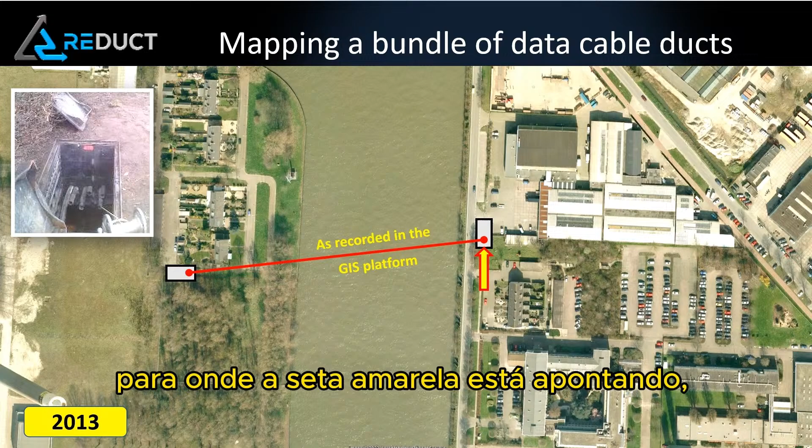Here is another example. This is a canal crossing, and there's 2 manholes. You see the left top picture, there's a manhole, and that's on the left-hand side. And they knew their line in the database, the GIS platform, was wrong because it entered the other manhole from the side, but they knew when they opened the lid, it was coming in from the south, where the red-yellow arrow is pointing.

So they knew it was incorrect, but they did not know how they got from A to B. They had an idea that they knew it was drilled, and they thought it was something like this. Well, in essence, in reality, this is what happened. So whereas they did not make a curve to stay close to the edge of the water, they drilled all the way to a parking lot, and then trenched it back along the fence line back to the road.

Now, this was done in 2013. If the original data, which is the straight line, was kept, and something happens on that parking lot, like you will see in 2022 - they've now built a building there, a couple of buildings - they were now able to at least give the data of where their pipe is. But if they had not had that remeasurement done, nobody would have known, and the risk of damage is huge.

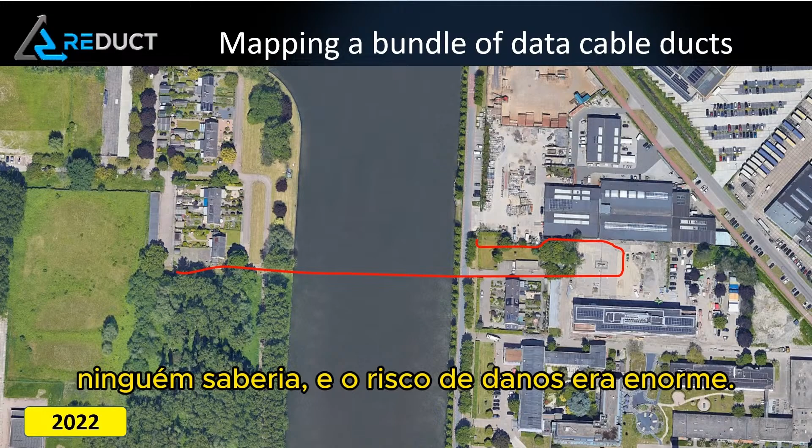Now, when it comes to crossbores, what we're talking about here, essentially the same is valid. If you don't know accurately where your pipe is to tell others to stay away, and you give them false data, they may be planning a route that goes straight through your pipe.

So how can we assure accuracy?

Well, there's a couple of options that the utility has. Intensive site supervision, but that is expensive because it requires a lot of manpower.

The second problem or issue that a utility has is that they need in-depth knowledge of the technologies used to capture XYZ data. So simply prescribing a high-end technology does not guarantee accurate results.

I always compare this to a simple example. If you give somebody a Mercedes, which is, according to many people, a good car, it doesn't mean you're a good driver on the road. It just says you're having a high-end piece of machinery, but are you operating it safely or responsibly? That's a totally different question. So prescribing technology does not solve the problem either.

Clear tender specifications for as-builts, that's a good start. That's where it starts. If you don't specify it in the tender as a contract, as a utility, the contractor will not execute it. You cannot rely on a contractor to always do the best he can. He will do the least he can if possible. That's my experience. But oftentimes you cannot blame the contractor, because basically the specifications given in the tender documents are so vague, it leaves room for interpretation, and that is always a danger, because maybe the GIS people at the utility expect something different than what they get.

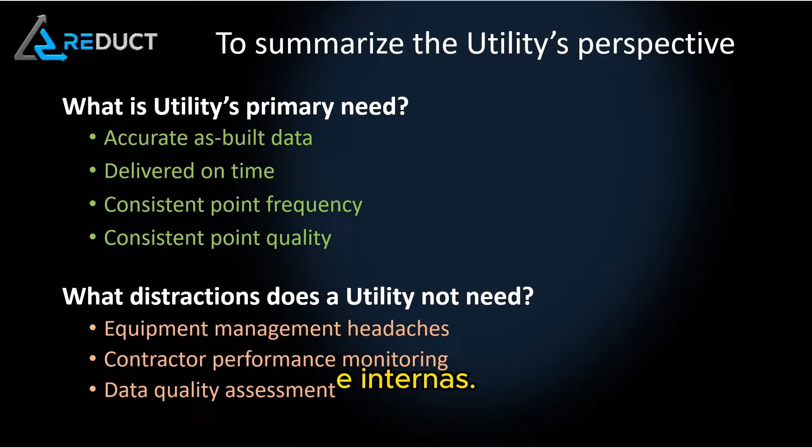So, the requirements for an accurate as-built. We already talked about the equipment. If you have good equipment, you can always have a better chance of getting a good result. But it's not everything. You need a highly skilled operator. Yes, a highly skilled operator is a plus, is an essential component in getting that accurate as-built done. But even those two pieces do not guarantee it. What you need, and what is new in essence, is the quality assessment and control. You have to assess and control what these two, the equipment and the operator, are doing. If you don't do that, again, things will start to slack.

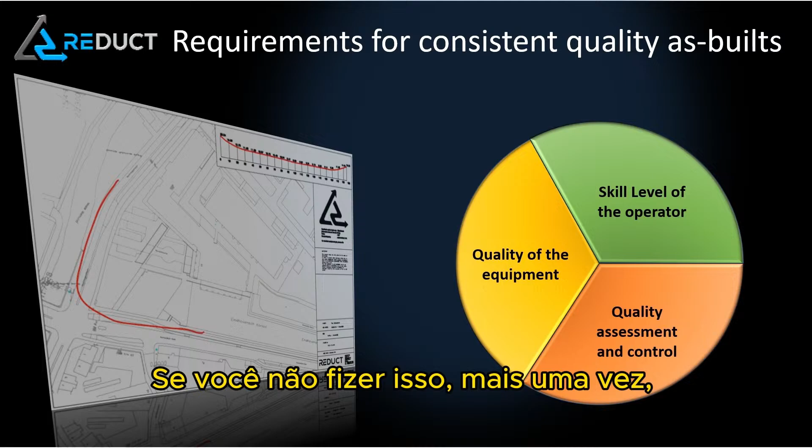So the flaw in the classic as-built process is that the utility will have a tender with as-built specifications provided to the contractors, multiple contractors, and the contractor provides as-built data in accordance with the specification back to the utility. Now that's nice, and it's been done like that for ages, and unfortunately it has an inherent conflict of interest, in that the contractor who's installed the pipe is also the one who is allowed to make the as-built. So the question is, if he or she knows something went wrong along the way or was not 100% sure, will they tell the utility, or will they provide the information that the utility wants to hear?

So on the other hand, it is the most efficient way. It's very cost efficient to have the contractor do it in the field. So the question that we have is, can we keep the efficiency but assure accuracy? Well, yes, the answer is a remote QA/QC monitoring process. QA/QC stands for quality assurance and control. And how does that work?

Well, in case of our equipment, we have set up a cloud service, and in that cloud service there is a mapping expert remotely located, not near the site, can be on the other side of the earth in essence, and they will receive the utility's as-built specs so that they have something to compare results to. The contractors use gyro mapping tools. Any gyro mapping tool that is compatible with the cloud service is possible to put into this process, into this service. And these gyro mapping tools send automatically performance statistics to the mapping expert, or to the cloud actually. And the expert then matches the performance to the as-built specs.

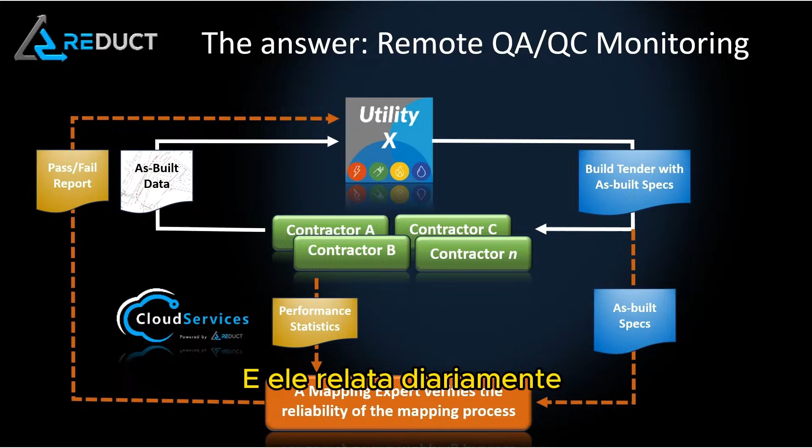And reports on a daily or weekly basis, a pass-fail for each and every measurement done on the utility's network, with in the case of a fail, a recommendation of remediation. Now that can be sending the contractor back to do it again, or whatever.

Now, what is interesting about this service is that the mapping expert will also immediately engage with the contractors that failed the as-built specifications, to understand first of all why it happened. It's not always the fault of the contractor. It can be some circumstantial factors. It's good for the mapping expert to understand the causes of failure.

That can lead to tools being recalibrated, operators being additionally trained, and it can also mean, in some cases, like we have done here in Asia, a slight adjustment of the equipment so that for that particular pipe, the mapping becomes a little bit more smooth. So this makes it very powerful for the utility, because the mapping expert engages on their behalf with their contractors.

To make sure that they all start to do the best job that they can. Now, what does that mean? Let's give an example. So this is the case of a large Asian power utility. The main thing, and I'll just leave it at this one thing, the main thing that the expert will consider is the spread between measurements.

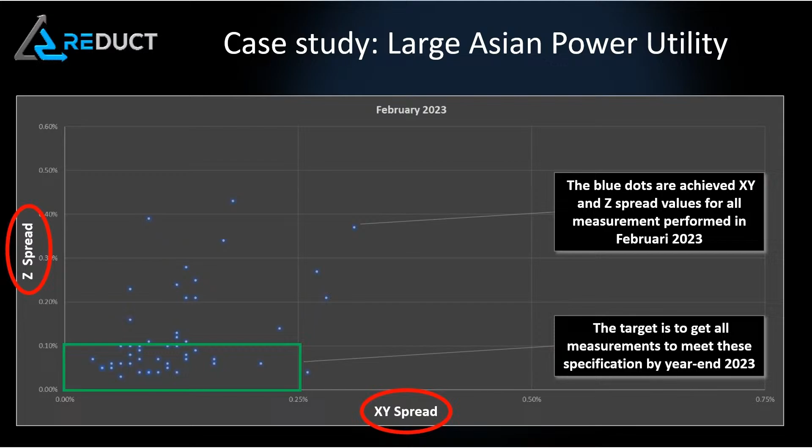So February means it was the second month of operation of doing this service for this particular utility. So we had just started. And this means that of the 47 measurements, 28 were in the green box, and 19, representing 40%, were outside of the box.

So the experts started engaging with the contractors, and we're now skipping to July 2023. In that month, 75 measurements were made. 66 were within the criterion and 9 did not. Now, in the meantime, they had also increased from 4 to 7 contractors working for them.

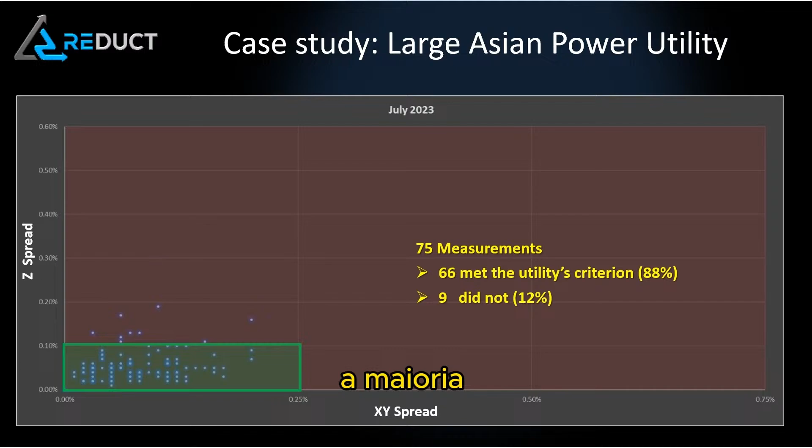So we've managed to get most of the results within the box. And interestingly enough, the target was to get everything in the box by the end of 2023. Now we're in early 2024, and I can tell you that 1 or 2 measurements are sometimes still outside of the box, but most of the contractors now by themselves will make sure they're within the box, because they know if they are not, they will have to go back and do it again. And that works very nicely.

Also, we at Reduct have developed 2 additional gadgets to make the work in the field for this particular power company a little bit easier, because sometimes the access points were difficult to reach. So we made a slide adapter so that it was easier to get to the entry points of the pipe. So it's a two-way street. It's not just bashing the contractors, it's working with the contractors and the utility to make sure the results are optimized.

Here you see in a clear picture the power of the quality assurance and quality control process. Once people know they are going to be checked, they will do a better job. So, in summary, the remote QA/QC process completes the circle without breaking the bank.

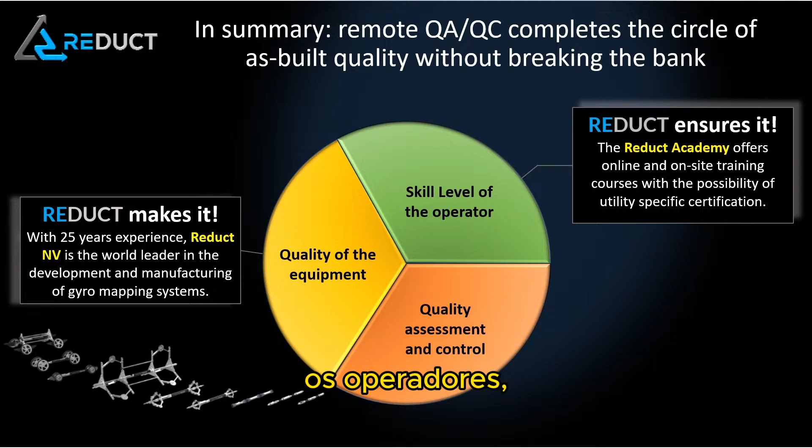So the equipment, Reduct can cover all of these by now. We make the equipment, we have an academy that trains the operators, and the operators can go there for additional courses, that can be online but it can also be physical. We have a couple of academy centers around the world. And we provide a cloud service to do the quality assessment and control, not only for our own equipment, but also for any equipment that is compatible with our cloud service.

So with this, I hope I have shed a slightly new light on how to increase the quality of as-built data, which is the essence. And the as-built data is important to stop people touching your pipe, cross-boring it, or otherwise damaging it. A lot of the cross-bores are due to the fact that incorrect data is in the hands of the drilling company or the boring company, and we need to stop that. We can stop it, so we must.

So with that, I thank you, and please remember that a pipe that is poorly mapped is a liability, not an asset, and Reduct turns liabilities into assets. Thank you very much, and we're open to questions.

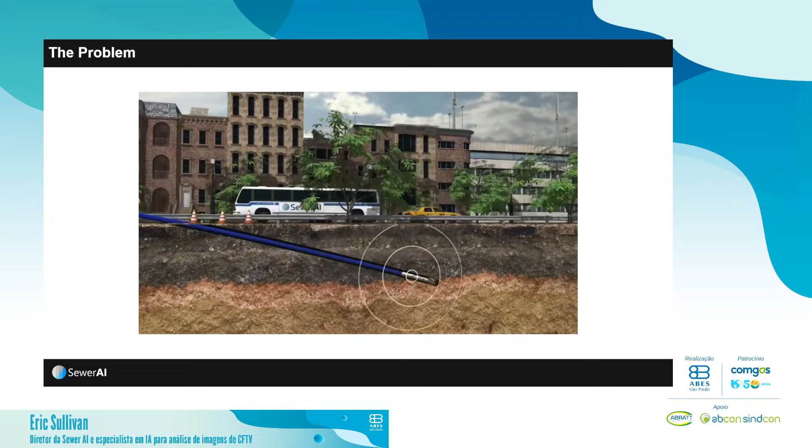Okay Eric, yeah go ahead and just advance 2 more slides please. Let's get to the issue of cross-bore itself. Yeah, 1 more please. Another slide please, yeah next slide. Great, yeah hopefully. So as we've covered already today, horizontal directional drilling is a beneficial trenchless technology. Unfortunately, sometimes the drillers are not always aware of the existing utilities underground, and there can be a potential for conflict with existing pipes that are there, particularly side sewer lateral pipes. If you could go ahead and go to the next slide.

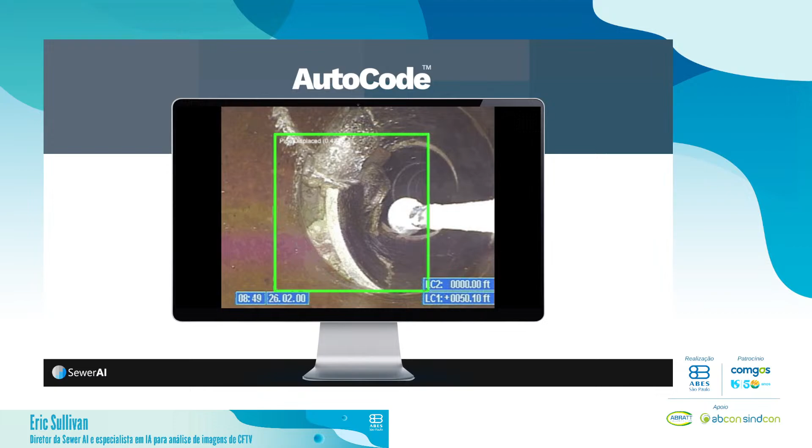This relates to the CCTV inspections that have occurred for quite a bit of time in order to address the cross-bore safety issue. Crews are televising mainline and lateral pipes and generating a lot of CCTV video. Our technology, called AutoCode, utilizes computer vision AI to automatically identify various different types of conditions inside of sewer and storm pipes, including cross-bore conflicts as well as related structural defects. The AI models are trained to look through every image and identify any of these types of defects in the videos automatically.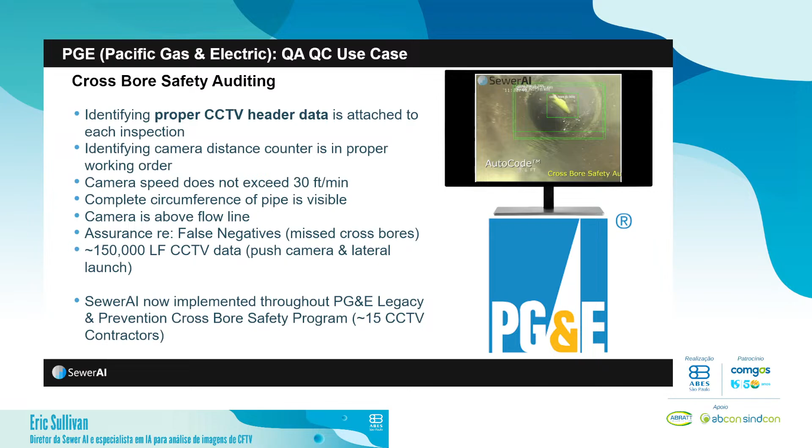It's a set of checks to look at the integrity of the database, but also the optical quality of these videos. The idea is that in cross-bore safety, you want to make sure you have good data, that you can have an assurance there is not a conflict, and that you're able to find all the conflicts that are there. So it's a series of different checks we provide using the AI tools, and also to ensure that the proper assets were inspected. The cloud enables the use of a dashboard so different stakeholders can see in near real time which inspections have occurred, but also if there's issues with different inspections, providing that feedback to the contractors, in some cases having them re-televise so assurance can be provided that there was no cross-bore.

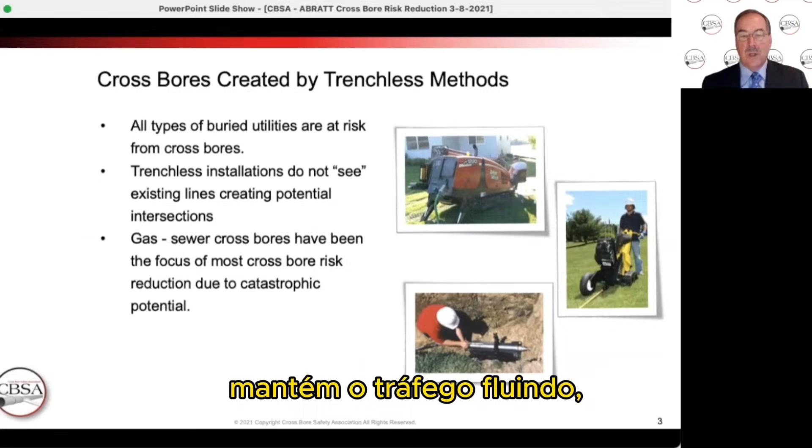Cross-bores are created when trenchless methods are used. You'll see an HDD machine at the top, a plow on the far right, and a percussion mole on the lower right. Trenchless is a great tool: it prevents damage to trees and shrubs, we do not have to dig up the streets as much, we don't have to replace as much concrete and asphalt, and it keeps traffic flowing. It's important for us to use these trenchless methods.

We've known about cross-bores since at least 1976. As time has gone forward, where we have non-conductive pipelines in place, we've typically put tracer wires with them during installation. But in the United States and Canada, we're finding that corrosion of those tracer wires is causing them to become unlocatable. So we believe that regulations should require GPS locates, mapping, and GIS systems for all utilities going forward.

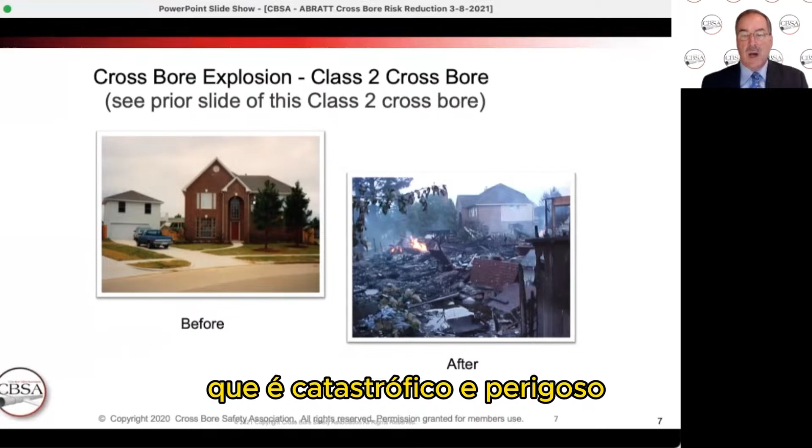It occurred within minutes after the actual HDD intersected the gas pipeline. Looking at this photo, we can see it is catastrophic and dangerous, and we need to avoid cross-bores. Often gas pipelines are installed through sewer pipes and lay there for decades before being found, often by drain cleaners.

A drain cleaner is called out by the structure owner or homeowner, and they bring rotating devices made to cut roots. These devices are also easily capable of cutting plastic gas pipelines. It's important for drain cleaners and homeowners to know there is risk.

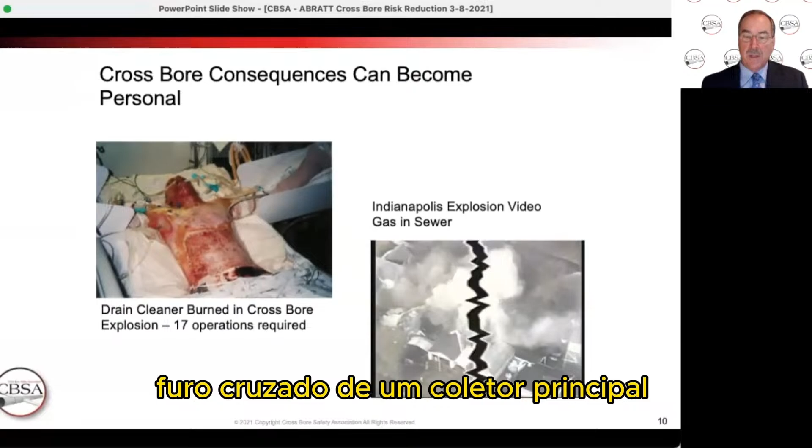Gas can migrate through pipelines, and if you have a cross-bore of a mainline sewer or even a lateral connected in a manner that transmits gas through other structures, several structures can be at risk from one cross-bore with a gas line.

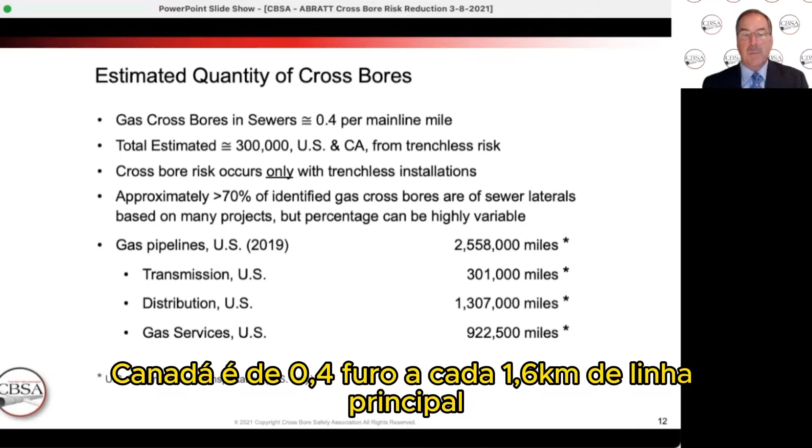Several agencies, organizations, and industry leaders realized that the cross-bore inspections and installations using cross-bore prevention processes were still leaving cross-bores behind. The credibility of continued use of trenchless installation methods was in question because cross-bores were being created and left behind, both after inspection and after new construction using what was thought to be good cross-bore efforts.

This would have been a major disruptor to the industry, including contractors, manufacturers, and utilities, if trenchless installations could not be utilized in the future. A high confidence recommendation was needed.

The Cross-Bore Safety Association and related organizations and agencies completed the leading practices for cross-bore risk reduction. Some organizations participating and asked to review the documents included the American Gas Association, Association of Equipment Manufacturers, Distribution Contractors Association, the Gas Technology Institute, National Utility Contractors Association, and several more organizations throughout the country.

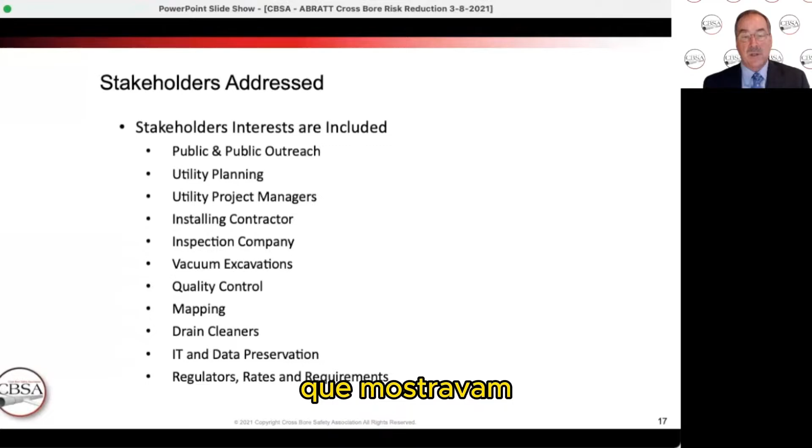The stakeholder interests were broad. We looked at public outreach, utility planners for construction and inspection projects, utility project managers overall, installing contractors, inspection companies, and vacuum excavation companies that were exposing potential cross-bore locations.

Quality control was very extensive throughout the document, covering mapping requirements, drain cleaning, IT and data preservation, and regulators, rates, and requirements. We ended up with 32 chapters, 88 pages, and many figures, references, and examples.

This is outlined in a format where you can pick a chapter of direct interest to your requirements, but it's advised that you read the entire document to get the full flavor and the interaction of all the different chapters and information.

We had this request from the regulators, industry organizations, and industry companies, and the end result was a document that required high confidence, with verifiable QC processes embedded throughout.

If you're starting a new cross-bore inspection program for legacy projects, you may know that schools, hospitals, nursing homes, assisted living facilities, large concentration buildings with many people, and difficult-to-evacuate structures are something you want to address first.

The benefits of cross-bore risk reduction efforts include protecting the public and industry workers, and reducing risk in a cost-effective manner. If you take a proactive approach, preventing cross-bores from being installed and eliminating cross-bores already lying in your sewer pipes will cost less than paying for the damage and related costs of an explosion or fire.

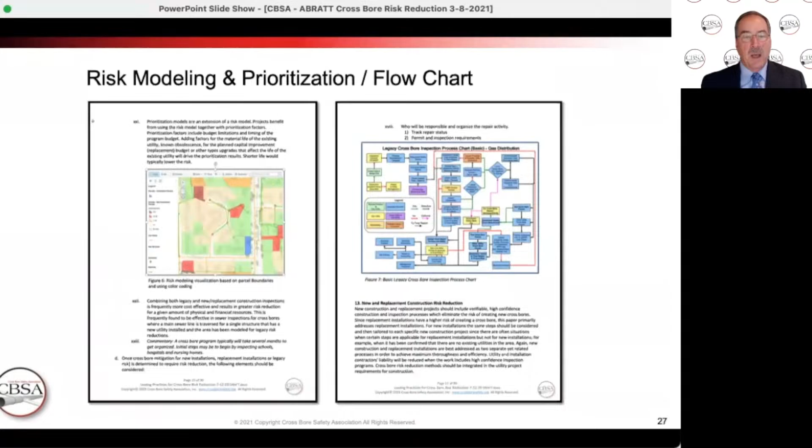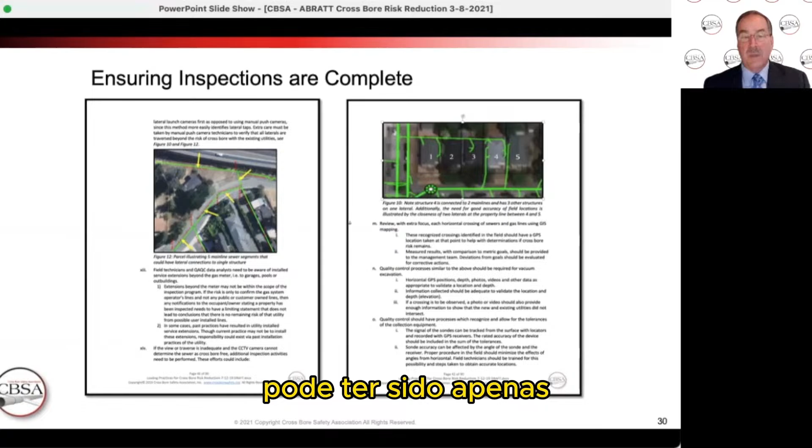There's a lot of information in that document of 32 chapters. Some page excerpts talk about risk modeling and prioritization of inspection programs for legacy lines. It also covers challenges of doing inspection programs on sewers with blockages, pipes that have sags allowing water to prevent cameras from seeing clearly. When navigating a sewer is difficult, you may have to access it from inside the structure to validate an outside addition to the house that may be a separate sewer added to the closest mainline. So you may actually have two services, as shown on structure number 4 where two laterals go to one house.

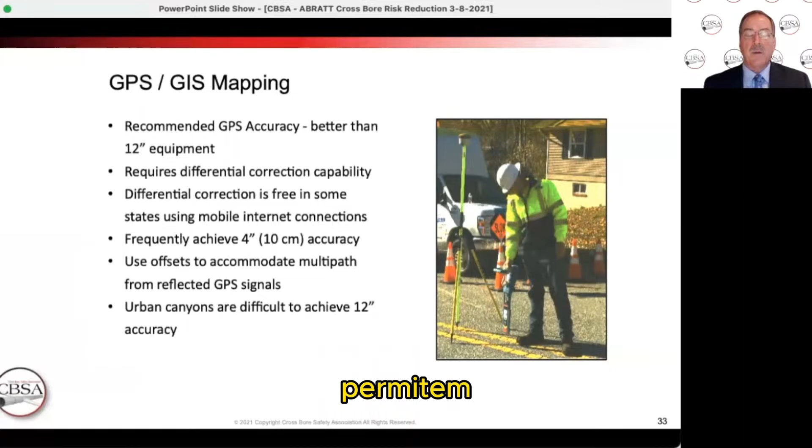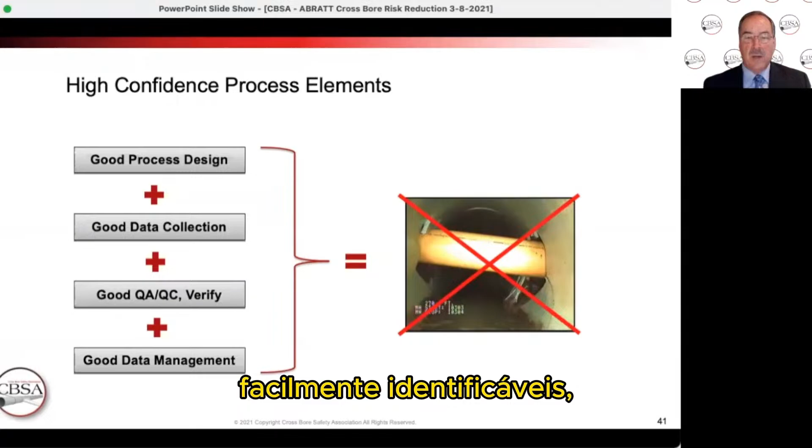Also, for illustrative purposes, the leading practices show examples of good communication tools. There's a lot of cross-bore information online, and the Cross-Bore Safety Association is the organization I'm representing here today. So all of this put together with good process design, accurate data collection, good quality control that verifies field work for both construction and inspection programs, and good data management that's accessible, easily identifiable, and geolocated, will eliminate the cross-bore risk.

We started out with many organizations concerned that trenchless methods may not continue to be used in the future because we were creating cross-bores. Even after inspection programs were done without good quality control and verification processes, we were still finding cross-bores in lines. This led to a potential where trenchless would not be utilized in the industry, causing worry at the state, federal, and regulator levels. Organizations and utilities wanted a good document with recommended methods that could give confidence we were not creating cross-bores, and that we had methods of eliminating and improving cross-bores in sewer lines.

So you need to have high confidence data. Low confidence gives you false security, and I believe that can create negative value. If you're telling people it's clear but it's not clear of risk, that is very risky and not good. So low quality work may have to be completely redone. If you're doing an inspection program, you may have to go out and do the complete system again, and that is very, very expensive and does nothing for the value of the enterprises or the people we're trying to protect.

Thank you for giving me the opportunity to speak with you here. The leading practices are a tool. There are many other tools out there that relate to cross-bore risk reduction. I suggest you reach out, read those, be thoughtful about them, and design your program for construction, legacy installations, and post-construction inspections to reduce the risk of cross-bores with very, very good practices.